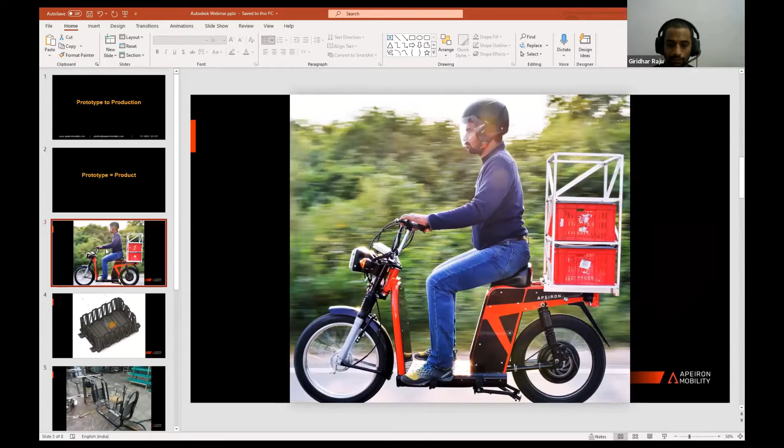So to start with, at a stage where us as startups and companies are, I don't think there's a lot of difference between prototype and product. If you look at our first iteration of the bike, that is this, and there is not much of a difference. This is our first prototype or our first product, right? So we built this, tested this thing, and delivered it to the customers, although we did tell them this is the initial batch and there might be issues which we are going to fix. Unless you are a Ford or a Tata Motors, wherein the moment you give any part to customers, you go in for a couple of million dollars worth of tooling, press tooling, molds, jigs, fixtures, and all that - I don't think there's a very hardcore difference between prototype and product.

So we try to ship all the prototypes we build, although we caution the customer and handhold them through what could go wrong and if there's any support needed. So to start with, I would say to keep the time or the effort minimum between building a prototype - something you just want to test the functionality of - and then something you can give to a customer. I think the whole process starts at the design phase itself.

In terms of when we start designing, we'll have to keep in mind what's the whole manufacturing process, as in how are we going to manufacture that at whatever scale we are. For example, in the first batch of our bikes, the first batch was 2 bikes, and then we did 10 bikes, and then we grew on from there. Same with our battery pack - battery packs for 3-wheelers.

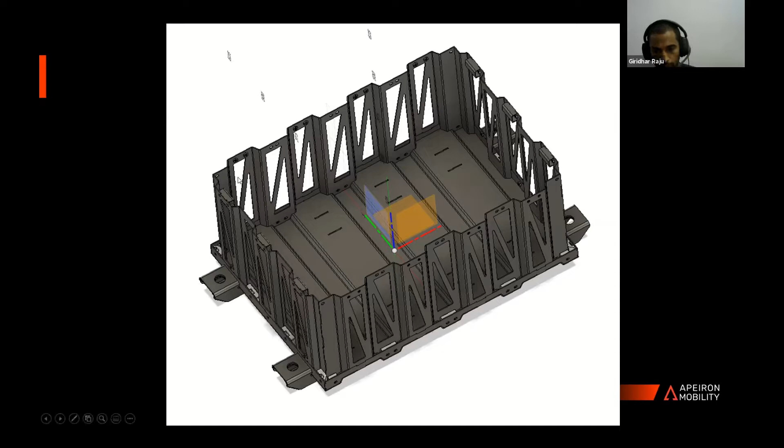For example, all these parts have been modeled keeping in mind that we are going to laser cut them out of say 1.6 mm sheets or 2 mm sheets, then weld them together, bend them in a press brake, and then weld them together. The important part is you just have to use the features to the best. For example, to assemble this thing, we don't use any fixture - there's not one single fixture used to assemble this. How we are able to do that is, I'm just going to go to my Fusion screen. Sure.

Let me open that up. Can you see my Fusion screen? Yes. So, the best part is these two.

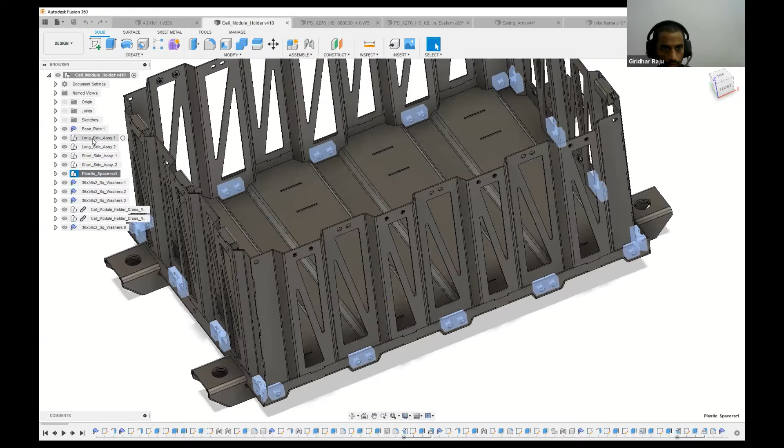For example, these two are two different parts. One of them is just a bent part, right? There's no complication. It's a straightforward 1.6 mm steel sheet with 120-degree bends. There are 12 bends in this.

But then how do we ensure this works? It's easy to do in prototyping. When you want to make 1 or 2 parts, you can just sit with the manufacturer and say this is the dimension I want, and at each step you go measuring that. Since it's a prototype, when you're assembling it, you can tweak here and there, use screws and stuff to tighten it up and manage the tolerances.

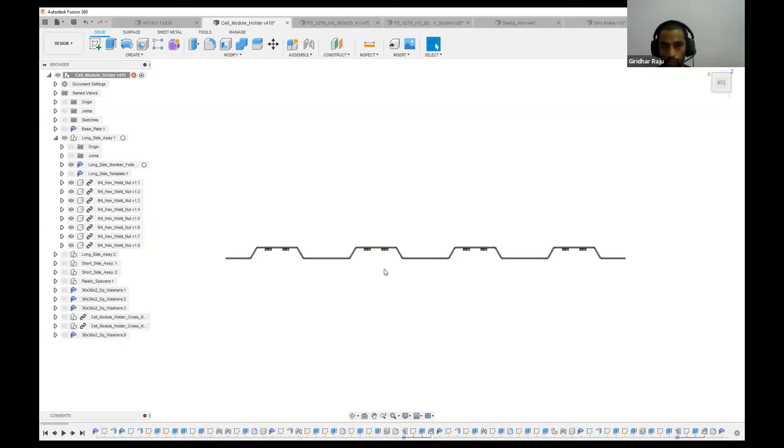But this current batch, as we speak, there are about 150 assemblies of these going on. So how do you ensure the quality stays and you get the same repeatability on the dimensions? What we did was add this member.

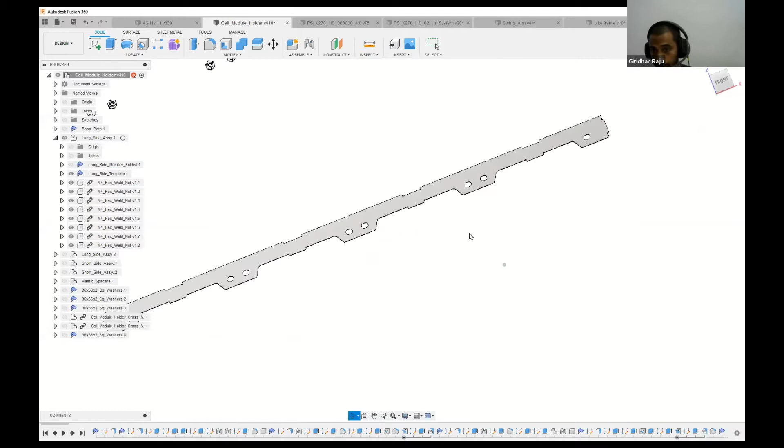If you see the slots here, with whatever tolerances we allow on these two different parts, this is a straight cut part, so there's no way a laser cutting machine is going to miss on that. The tolerances are usually up to 0.02 mm, depending on how old the machine is and how good the operator is.

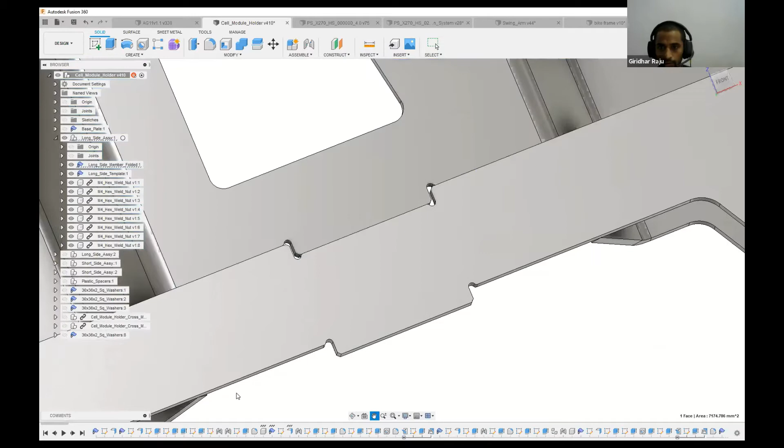Now if this part is cut and bent, it will just go ahead and sit in these slots. There are slots for each bend here. I don't want to use fancy words, but I can't find a better one — I'd just say it's designed for assembly or manufacturability. I don't have to have a separate fixture to go ahead and assemble that. So we made these parts.

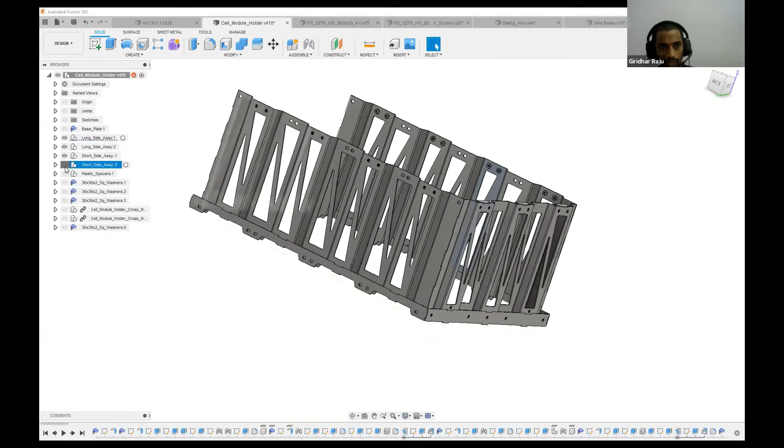Now once you do that, how do you go ahead and make a full box out of it and ensure there's no flex? There are 12 bends here, about 9 bends here, 10 bends there. These are 1.6 mm sheets, and the length between this part and that part is about 500 mm. How do you ensure they align properly without any mess?

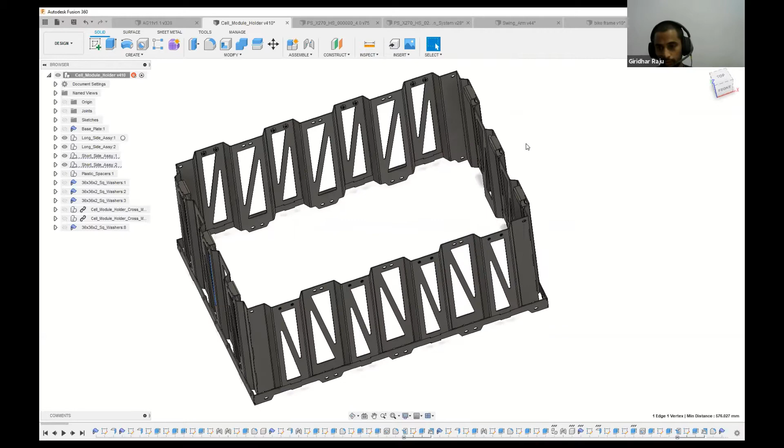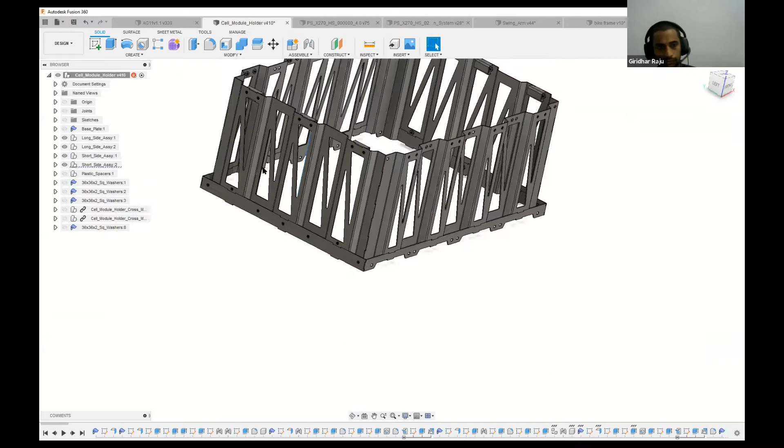You use the same slots at the corners. So if the part is assembled right, they just go and sit there in the respective slots. There's no way the operator or welder assembling this is going to mess it up. Similarly for all the parts, same with the base plate that we do.

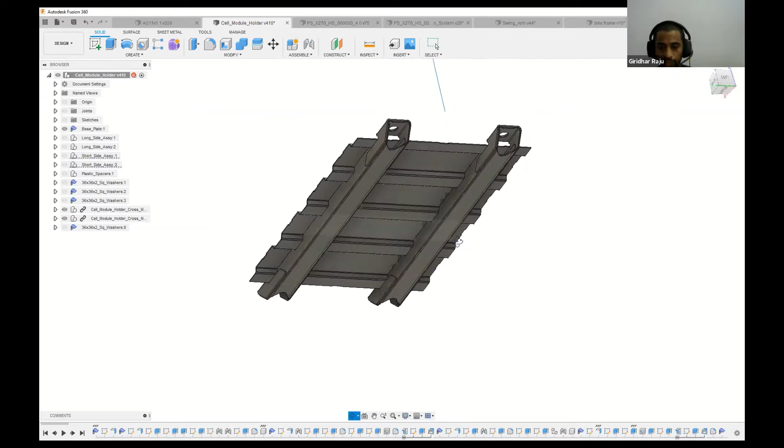The most important and significant structural part is the base plate. It's got 12 plates. This is going to take the whole load of a 140 kg heavy assembly, and this is an automotive part, so it's got to take 30G shocks and 3G vibration loads for about 2 hours in each axis.

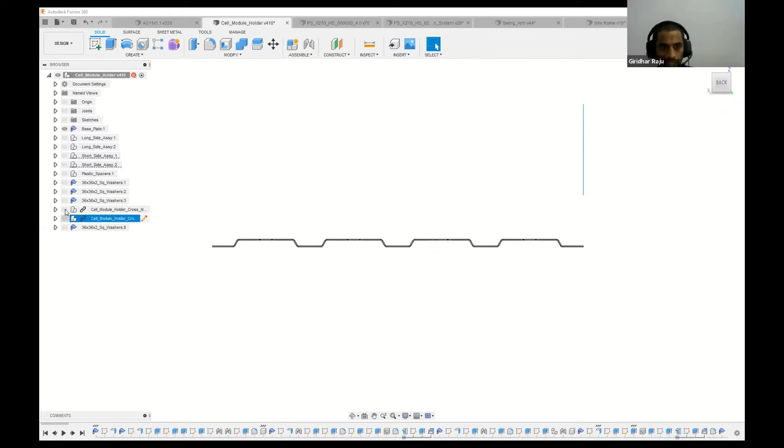We did the same with the base plate itself — it's a 2 mm sheet, just bent, no complications — but we ensured there are alignment holes. These alignment holes have similar slots on the reinforcement bars.

This is one example of how you can take any product from your first prototype to production without investing significantly in tooling and taking time for that. I'd say the biggest challenge for any product going from prototype to production is the cost of tooling and the whole cost of fixturing the assemblies.

Once you take care of these things during assembly, and if you're cognizant of how you're going to assemble the thing, you can build the whole design around that. Figure out what tools you have — we use a significant amount of press brakes, and CNC press brakes are quite accurate.

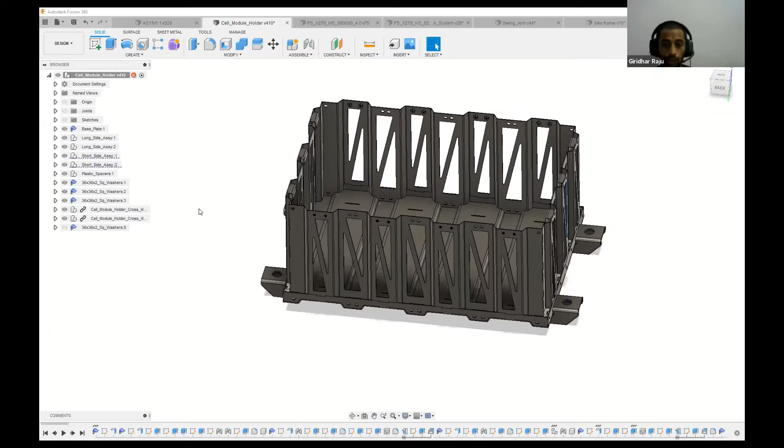You can get angles close to 0.1, 0.2 degrees, and the dimensional accuracy of about 0.5 is easily achievable. Ensure that the assembly has tolerance for such an offset. Also, this is a structural part, and for shock loads of 30 G on each axis, you have to ensure that these don't deform.

So what we did for that is, we have 3D printed spacers. We have a farm of about 4 3D printers running at least 18 hours a day on a continuous basis. With 3D printing being so cheap nowadays, I think it's a no-brainer to use it in all kinds of manufacturing processes.

Same with our bike. When we built it, about 8 to 10 kgs of plastic on the bike were 3D printed. I'm not saying go for 3D printing for all parts. What I'm trying to say is you have to take stock of what resources are available to you, and then design your process and components that can be built on those systems and scaled.

It's a different case for each company. For example, Prusa almost 3D prints 100% of the plastic parts on their printers. It's a huge company - they've sold about 100,000 printers so far overall, and most of the parts, at least all the plastic parts, are 3D printed.

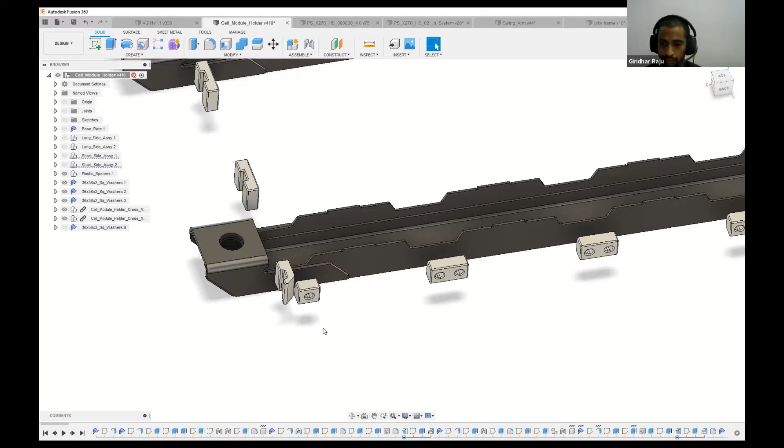That's the gist of it. Apart from that, during the design process you have to be extremely aware of what components are available, and what products already exist in the market that you can use ready-made. For example, bearings are standard, linear rail guides, fixturing components. In the automotive case, there are a lot of suspension parts available as standard.

And the wheels, tire patterns, handlebars, and displays - we just have to try and leverage all those things to keep tooling costs low and go to market as soon as possible.

The benefit of doing this isn't just about keeping costs low, but it helps you get to market faster and iterate faster. If you can realize something works or doesn't extremely quickly because you have the parts available already, rather than going full hog and doing the tooling - injection molding tools can be extremely expensive.

Once you do the tooling and you figure out either design changes, or the customer requirement changes, or the part just won't sit right - these are extremely costly mistakes, and they can set you back in terms of going to market by about 2 to 3 months.

Specifically with situations like now, the pandemic happening globally and suppliers not working full time, it can set you back by 6 to 9 months. You never know - specifically, there's a huge shortage of chips.

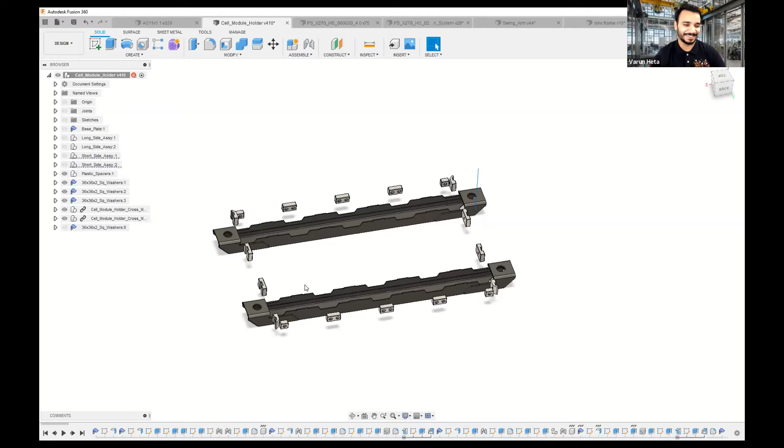Thank you so much, Giridhar. I love the approach that you are actually using additive manufacturing in your end product and improving your workflows - this is a very good thing. One question I have is, I see these small connectors attached to the assembly, the white ones, which are additively manufactured. What is the material you're using?

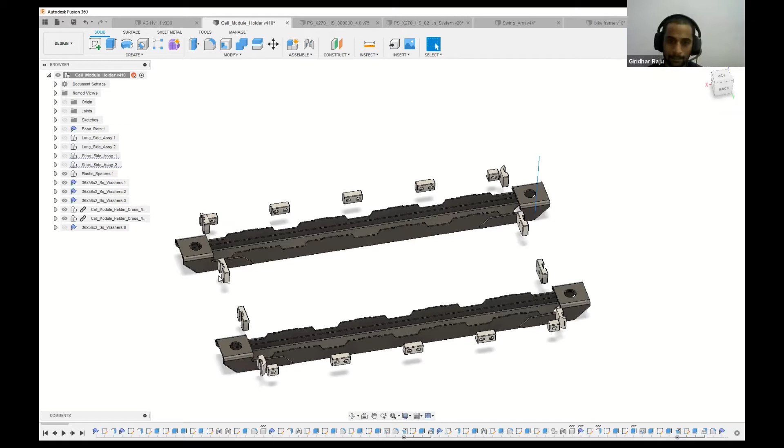This is ABS. Ours is an automotive component, so we mostly use ABS or ASA. When we tend to talk about Prusa, usually people are using PLA - I personally use that because it's fast through the plate, but that's not convenient, I think.

The problem with printing ABS is you have issues with warping and things like that - the print just warps and won't stick to the bed. So you just have to go through a bit of trial and error.

So in our case, we have enclosures for all the printers, and ensure that the printer is printing at 100 degrees Celsius all the time. And the bed temperature is 110.

You just tweak little parameters, and you should be able to get pretty good prints with ABS. Personally, I love ABS, the way it prints, the strength. A lot of times we just print the part in ABS and then machine that to get a better finish, or to get certain forms that you cannot necessarily print strong enough.

Well, it's totally a great approach. You are using rapid prototyping techniques for your actual production job, that too in sheet metal and laser cutting. Yeah, so I think it's a good takeaway.

I remember when I visited your facility in Bangalore, you were showing me one great big variety of bikes, one yellow bike and all those things. Do you have anything to share on those lines, if that's not something sensitive?

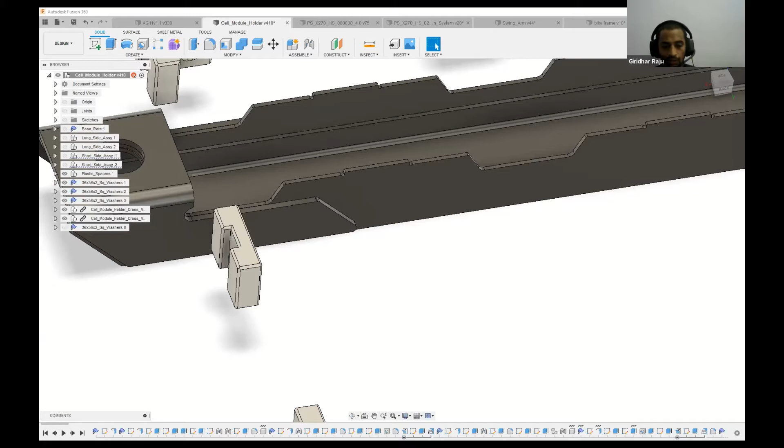For example, if the same part that I was discussing, if I have to do 100,000 parts, the process I'm currently doing is going to be expensive and time consuming. In that case, I'll have to invest in tooling. But there needs to be validation that I'm going to be selling 100,000 parts every month before I go to tooling at that scale, rather than doing 10 parts a month and investing in tooling while not being sure it's going to scale or not.

Totally. The way I see this also is, I think whenever we design a prototype or something, we should all consider designing it as identical to the actual final product, so that we maintain all the standards and processes.

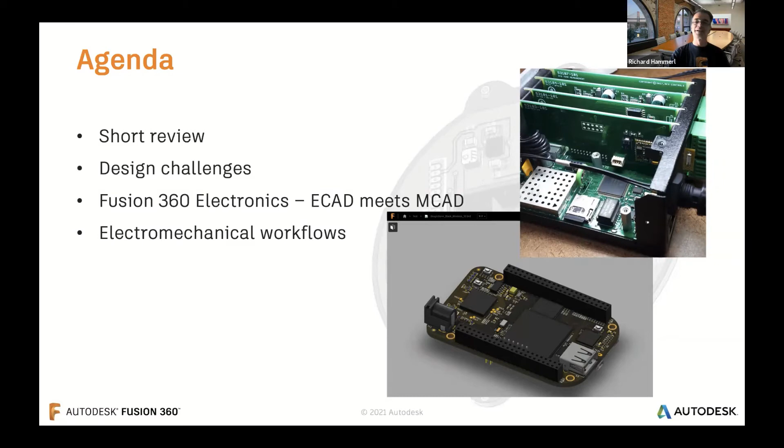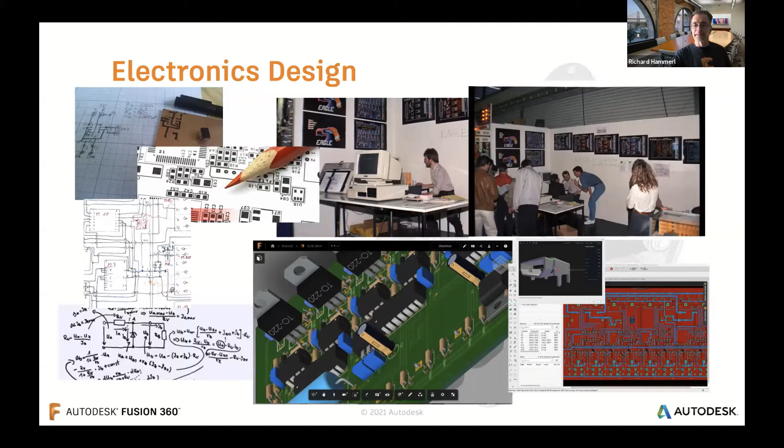And if you compare it to the mechanical world, there was a similar development. In the beginning, you drew everything on paper. I learned this in my studies—I started to draw with big sheets of paper, construction plans and all this stuff. And then, of course, we got computers.

The steps from one to the next are always shorter and shorter. So that's something we see—we increase the speed of our design tools. And that's the reason I would like to talk about the design challenges.

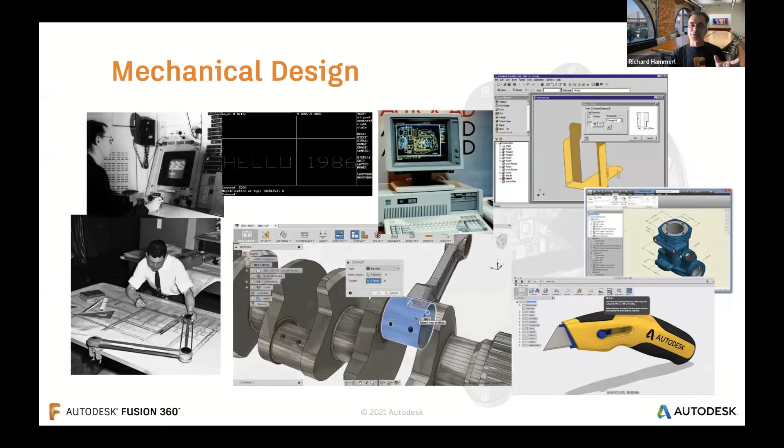What do you expect? What do you need as an engineer if you want to do electronics, if I want to do product design? I would like to have a design environment that meets both the electrical world and the mechanical world. Because do you know any product—of course there's some—but most products have electronics inside.

I also want to be sure that everybody works with the recent version, that all the functionality is there and that it works as I expect. And I collaborate—I want to work in a team, and I need to quickly respond to design changes, for example.

If you go back, when I started with CADsoft and Eagle, do you know how we did technical support? We wrote letters, put them in the mailbox and sent them. A support case took a week or two. Those times are gone—it's good that they're gone, but we need quick response. And that's why we bring...

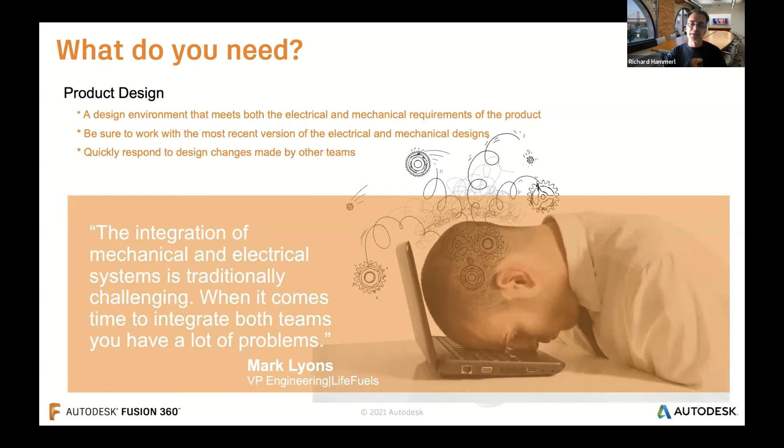...electronics and mechanics under one hood into Fusion. And because we want to have an effective collaboration, we want to work together.

Varun, you're in India. I'm here in Europe. Our colleagues, most of them are on the west coast of the US. So if we would work together directly, I can't simply take the phone and call you. I need a way to be efficient in collaboration. That's something we bring into one platform, and that's again Fusion.

And of course, if you think back, how do you exchange data? It's a file conversion. When I was in Eagle or any other ECAD system, and I want to bring my ideas into the mechanics world, I export something—a STEP file, a DXF file, whatever it is—and then I import it.

And then you decide, okay, you have to do a change. I have a second version, a third version, a fourth version, and say, oh, the fourth version wasn't good, I have to use the third one. Then you send the third one to your guy who does the mechanics. He gets a lot of files, and it's hard not to make an error here.

I've seen this very often—say, okay, there's something wrong. Yeah, it's the wrong version you took, you have to take this one. And this costs a lot of time and money, and that's something we want to avoid.

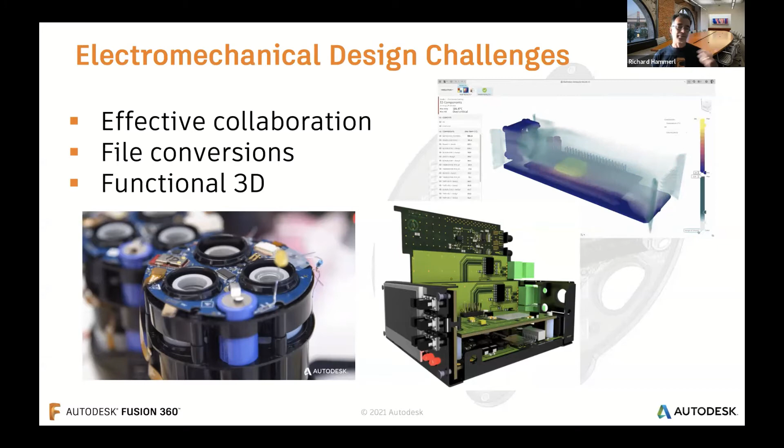And the other thing is, we would like to have a functional 3D. So I don't only want to have an image of my PCB, I would like to use it. I would like to do a thermal simulation, as you see here in the top right image, for example. And that's something we want to do with Fusion.

I think 5 years ago, Eagle was acquired and brought into Autodesk. Our first step was to make Eagle collaborate with Fusion. This was the first step—I want to have my 2D PCB, I want to create a 3D, and then I want to go on and do something with it, bring it into my product. This was the first step.

There was a lot of development in recent years, a lot of functionality came into Eagle. I don't want to mention all of it, it would be much too much to tell you. There are a lot of new functions in routing—guided routing, push and shove—a lot of improvements also in schematic and library design. We have 3D models assigned. Yeah, that was the first step.

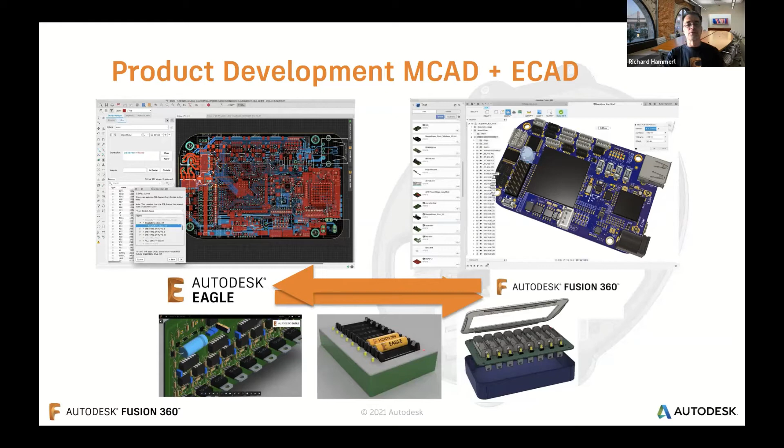And I think since the beginning of last year, 2020 in January, we have electronics in Fusion, what we call Fusion 360 Electronics, of course. And let me show you how the workflow now is.

I'm in Fusion and I start the electronics design. Now we go from bottom left to the right. And the first step typically is, of course, I would like to create my schematic. I have an idea and want to bring it onto paper, so to say. And therefore I need components.

Fusion offers a lot of components for you, so you can use them—resistors, capacitors, all that stuff. You have access to all the libraries that have been made with Eagle 20, 30 years ago. So you have access to a big pool of libraries where you can also use library definitions from the web, download them. And of course, you can create your own. So you build just your schematic.

And at any time, you can switch to number 2, the 2D PCB. I simply click, I want to start with the PCB—that's one mouse click, and Electronics opens the 2D PCB editor, and you can start arranging your components. You can think about the geometry of the board, for example. Every change you do in the schematic is automatically transferred into the board, and vice versa, the other way around.

With the schematic, you see, I could also do a SPICE simulation. If you're not aware of what it is, you can simulate the functionality of your electronics design and see what happens if I switch on and have power on my signals, what happens in the signals. So you can evaluate, is it good or bad what I'm doing here? Will it work as expected or not? Yeah, so that's also a part of electronics.

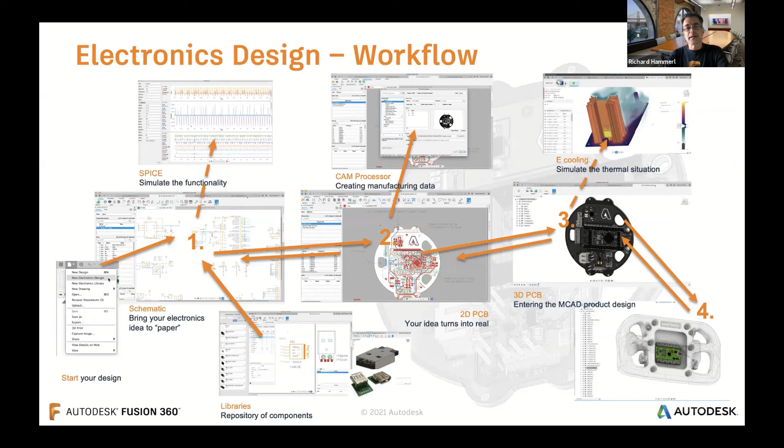And the next step is, as I already mentioned, we have the 3D PCB as the core in our design process. And from this 3D PCB, I can do an e-cooling and thermal simulation on the board, for example. I can use Fusion for rendering and get super nice images of my product. I can create milling data, so if I would like to mill a prototype, that's also possible.

Of course, I can go into a manufacturing drawing, bring my board in, have a part list in the manufacturing drawing. And of course the main purpose or the main workflow would be going into the design workspace, bringing my board into my enclosure, into my product. Not only one, there could be more boards, it's an assembly, and you bring everything into your assembly drawing.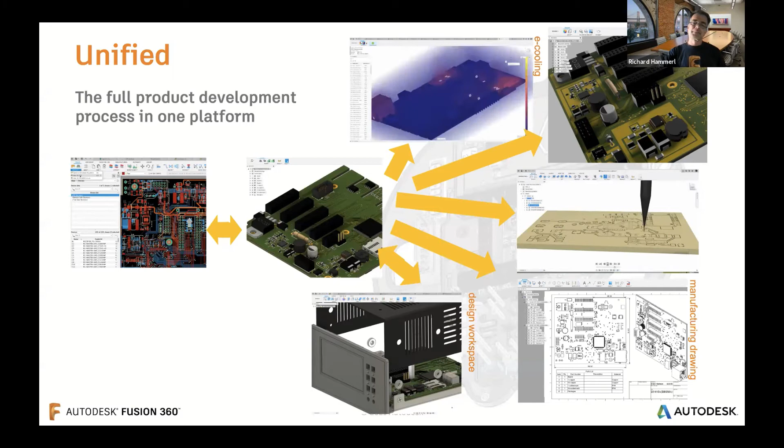And one nice thing I mentioned in the beginning was about collaboration, and that's something I would like to show you. It's also really nice for electronics, because you could share your project, your schematic, your board, your 3D PCB with others, with your colleagues, with your boss, with somebody from marketing, because you simply give them a link.

They even do not need Fusion to work with, they don't need to know how to use and open the files. You give them a link, they use the browser, look into this, they have access, you have the 3D, you can do some commenting, you can write some information there. So it's always up to date what you'll be seeing here. If you do a change in your board and save it again, you will always be up to date and everybody knows what's going on.

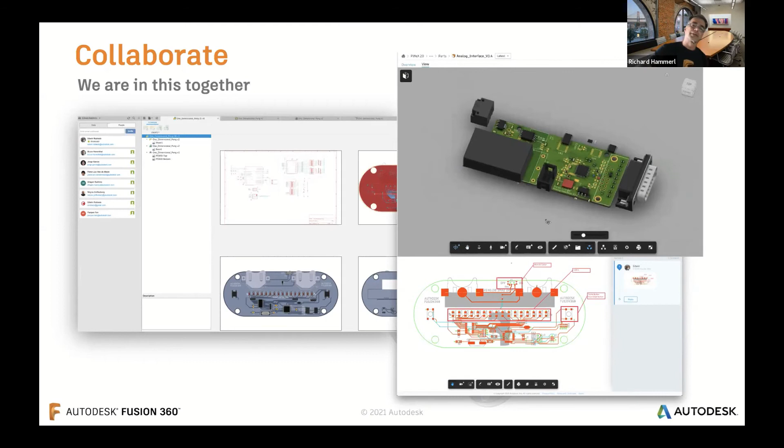And that's a really nice environment. It's not nice, I don't find the right word, it's really amazing to work this way. And all we have is inside Fusion, it's one platform, there's one set of data. You don't have to convert anything. You just go into the schematic, into the board, into the 3D PCB, share it with your colleagues via Fusion Team so they can look into it with the browser, for example.

Okay, so now let me show you a bit about the workflows.

There are basically two ways I think we're working, and finally it's a mixture of both. One, the PCB drives the geometry of the product. Thinking about electronics, people designing the electronics know everything about the circuits, what parts they want to use, what's exactly inside. The enclosure, they don't care, that doesn't matter. We discussed this often at Autodesk, because an electronics customer thinks totally differently than a mechanical customer, since he has totally different priorities. We think about electronics inside our PCB and the enclosure isn't important. That's what I know from the electronic side.

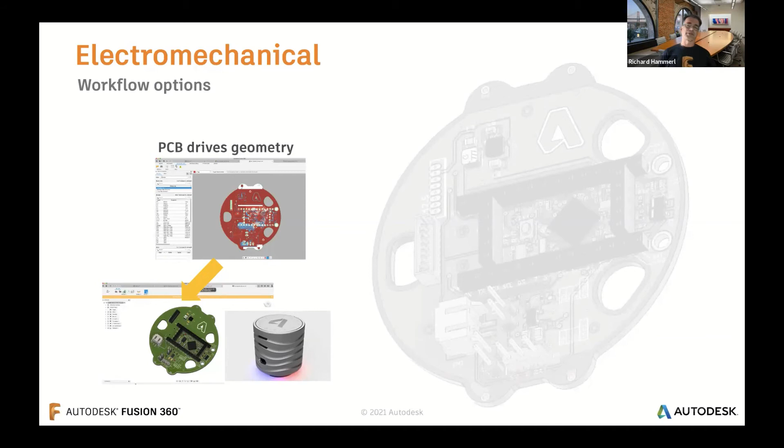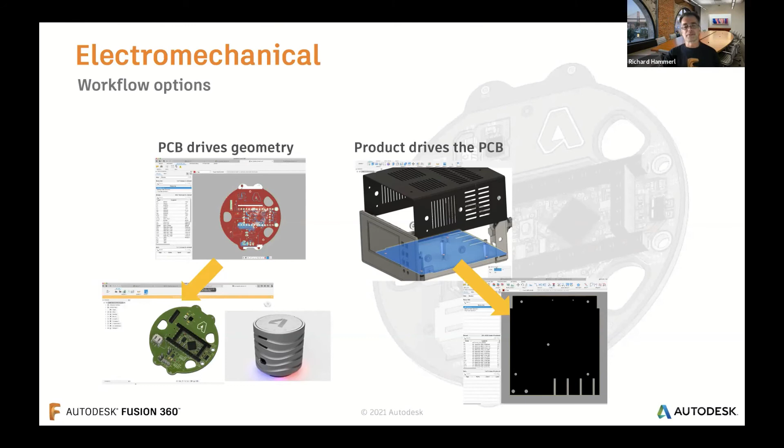But of course it's also the other way around, because if you have a product designer, he wants a smooth appearance, it should look good. He says, okay, that's the product, and you have to bring in your electronics. I don't care what's on your board, but it has to be this size, you have this room, that's exactly what you have, nothing more, and you have to try to bring this into the product. So we have these two ways of working, and I think it finally evolves into collaboration, and that's the reason why we do this in Fusion.

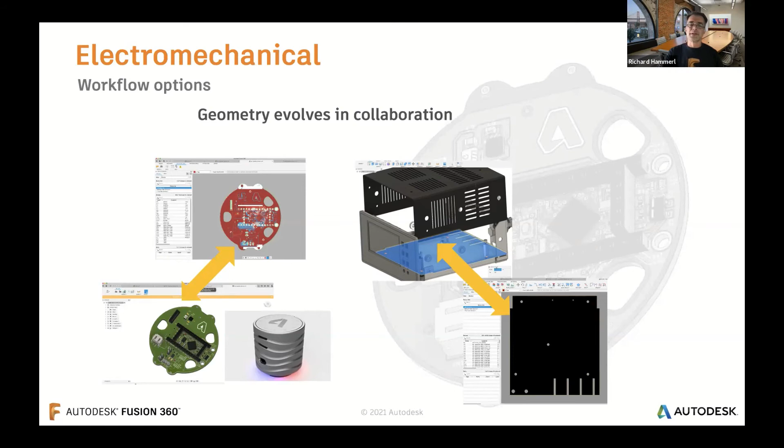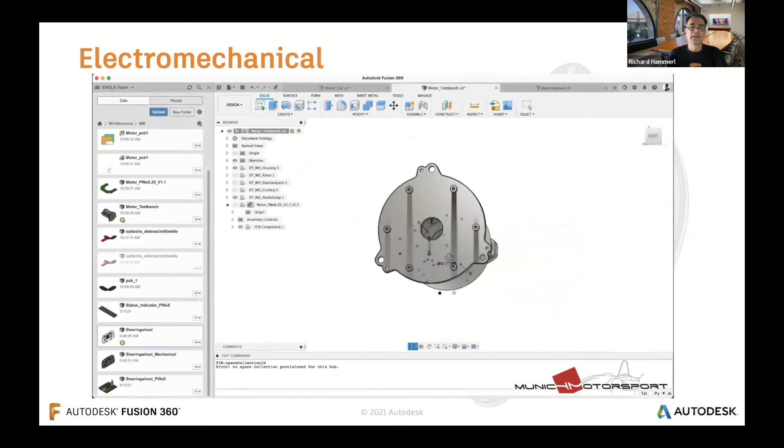Here we see, for example, that's an electromotor for driving an e-vehicle. It's mounted on one of the axes for each wheel. And what we like to do is, you see here on the back side, I have different connections and so on, and I need some electronics. Let me switch off a few of the things here.

Actually, you see we did the first try. There is already a printed circuit board. Now you see it in a moment. Here it is, just as an idea. But we want to do a change. I would like to have another geometry of the board, and I have a sketch here inside which describes the contour of the board. It's pretty easy to design.

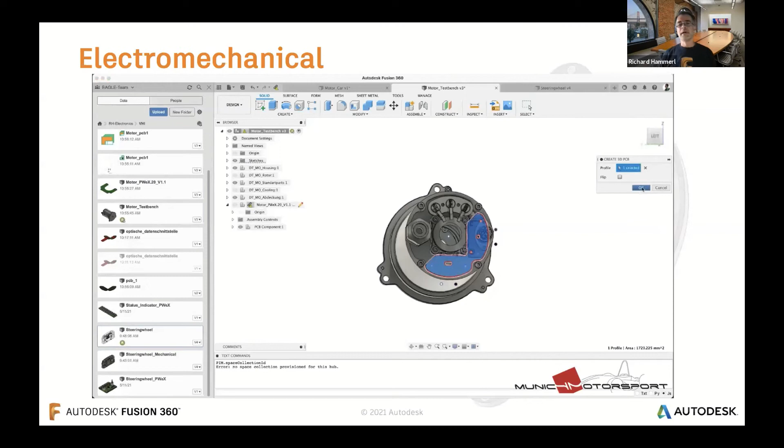I simply click Create 3D PCB, click here, start, select the profile. You could have one or more profiles, and you can care about holes and so on. Then I say okay, and now a new tab opens and you see the 3D PCB, the shape, it's there, exactly how you designed it in the mechanical part. Now I save it, and let's go to the next thing.

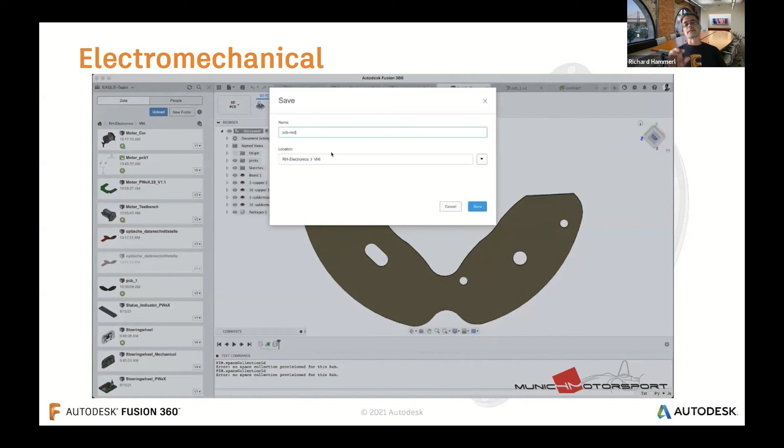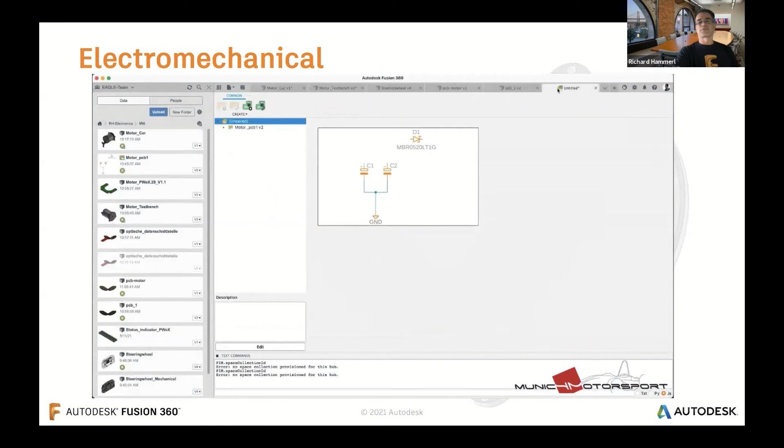So that's the mechanical side. Now I'm on the electronics part, because I would like to design a schematic. Oh, please, I have to apologize, 3 components, that's not really a schematic, but just to show you how it would work.

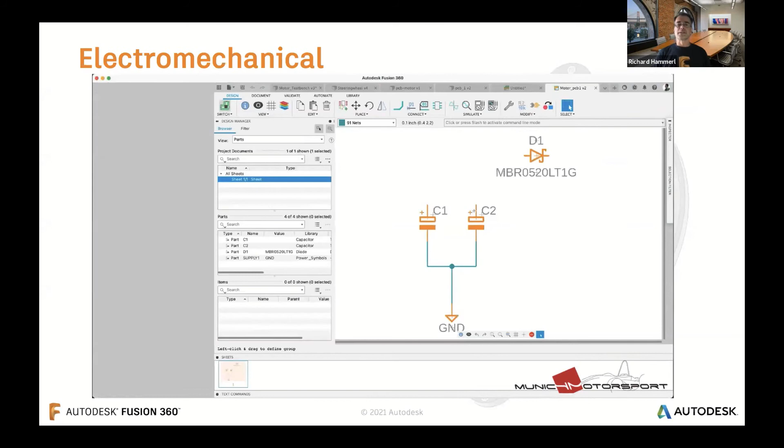So that's my schematic. At any time I can switch into the PCB. I click here, switch to PCB, it's the 2D PCB document. You see here it opens, you see kind of a template, it's a rectangular board. I move the components there, of course I can arrange them, I can start the routing, I can mirror them on the bottom side, I can do whatever you can think of.

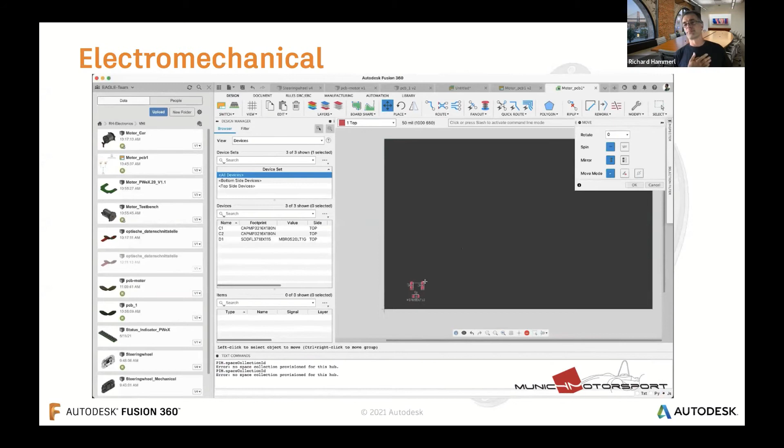And of course, at any time, ideally at the beginning of the design process, you get the contour from the mechanics part, from your mechanics colleague, and that's very simple. I save my board now, and let me switch to the 3D PCB and show you how I bring it into the 2D PCB. That's one mouse click, so now it's two mouse clicks. I'm here in my 3D PCB, and now I choose Link to 2D PCB. That's the icon. I select which PCB, it's my motor PCB, and simply say okay, and it's linked and it's inside. So the rectangle is replaced with the contour coming from the motor.

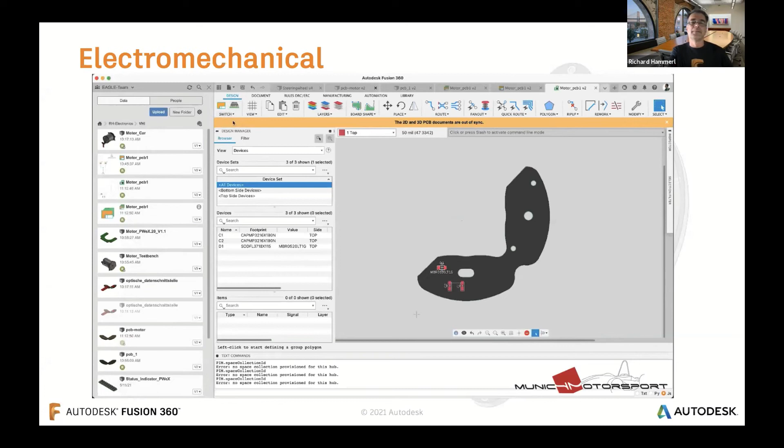Now, of course, I have to do some rearrangements, and you see the yellow message, the 2D and 3D PCB are out of sync. Why? Because I don't have the components on it. So I just click here, View 3D PCB, click on it, and now you see it's in real time. It takes about 2 or 3 seconds, and then the board is populated. So I can go back and forth, it's just switching the tabs from 2D PCB to 3D PCB.

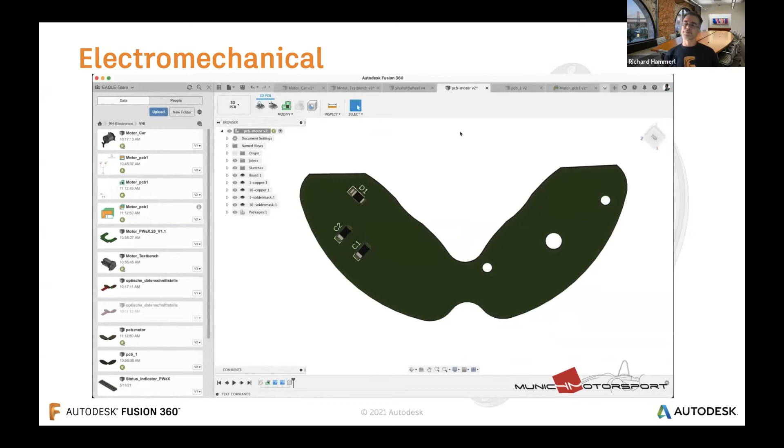And there's even one step more in this last slide I would like to show you. This is about edit in place. And here we're in a situation, I know it's very simple, I have an enclosure and I have a PCB inside my product, inside my enclosure. And now what I see, or what I can do, just let me start this.

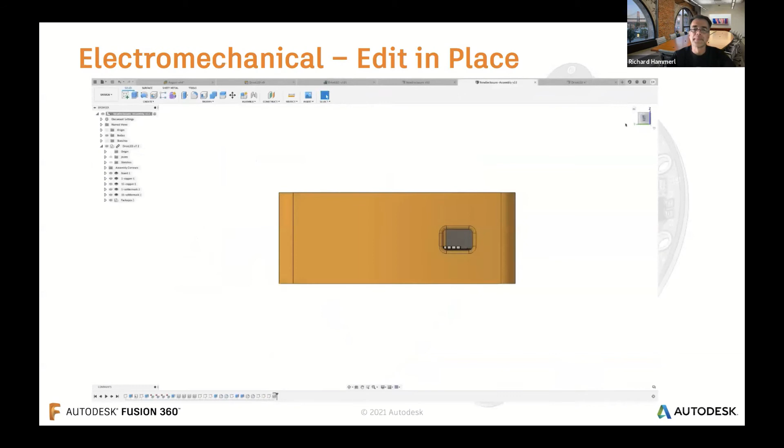Go back. So here you see that's the 3D PCB linked to it. And now if you move it, you already see the opening for the USB connector is not at the right position, and I would like to change this.

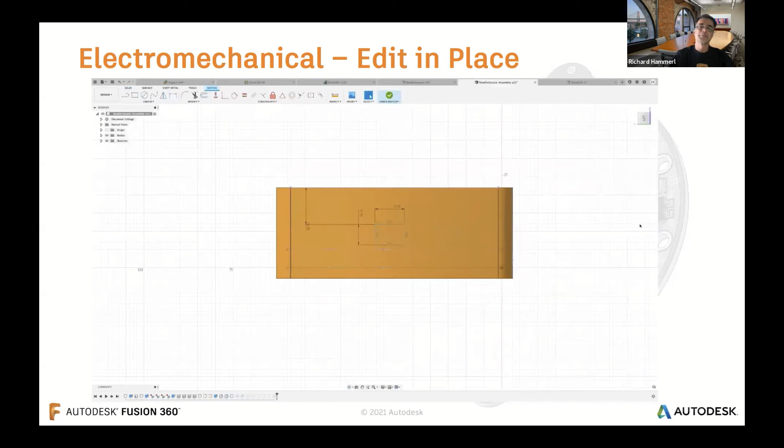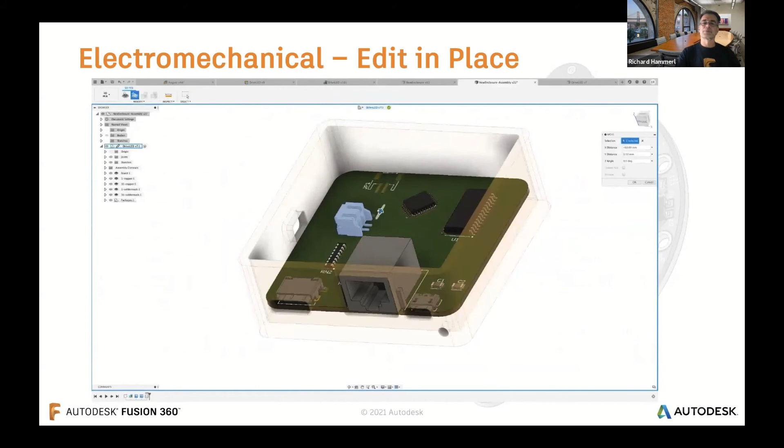I have 2 options. I can either edit the sketch here and simply move it to the right, to the correct position, or I could do an edit in place for the components of the electronics part. If you go here, you see the small pen, red and green, red and yellow. You click it, and you enter edit in place mode. Now I can click, move the component, rotate it, move it on the board, bring it to the right position.

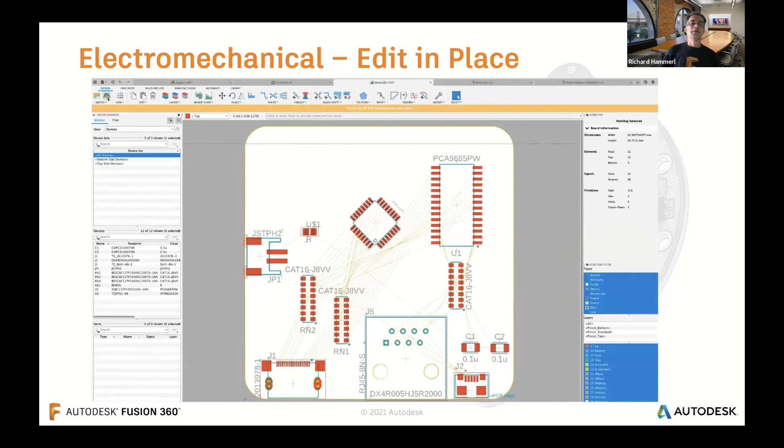Here it's done. I say okay, save it, and it's transferred onto 2D PCB, and so it's back in 2D. You see here I'm already on 2D PCB, and now I just want to move something on 2D PCB to show you how this goes back. I save it, say view 3D PCB, go into the assembly, and now you see it takes some seconds, and now the components move.

So that's basically the workflow we have, and of course it's a very simple example. I could have shown you more sophisticated examples, but basically I think it's okay to see how we work.

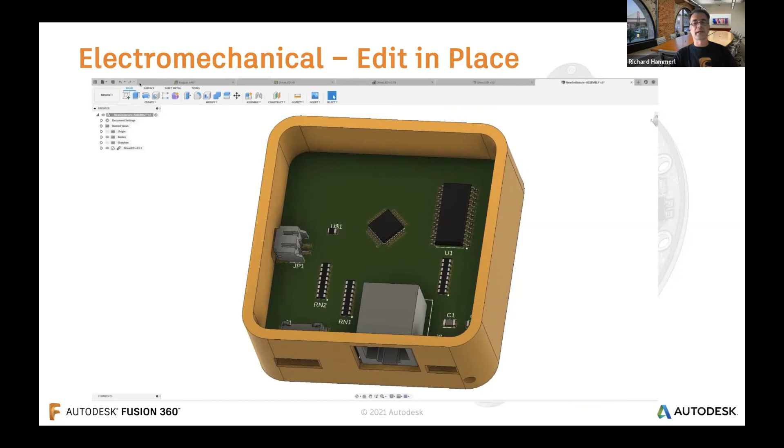And it's really, as it's written here, it's just one tab away. So I go from 2D PCB into 3D, make changes, go back and forth. I go into the assembly, I can do some changes, edit in place, and bring this back into the PCB.

And everything under one hood. No file conversion. Easy collaboration. You see immediately if something happens in the 2D PCB or in the 3D PCB, you're always up to date. And that's what I wanted to show you. Thank you for your attention.

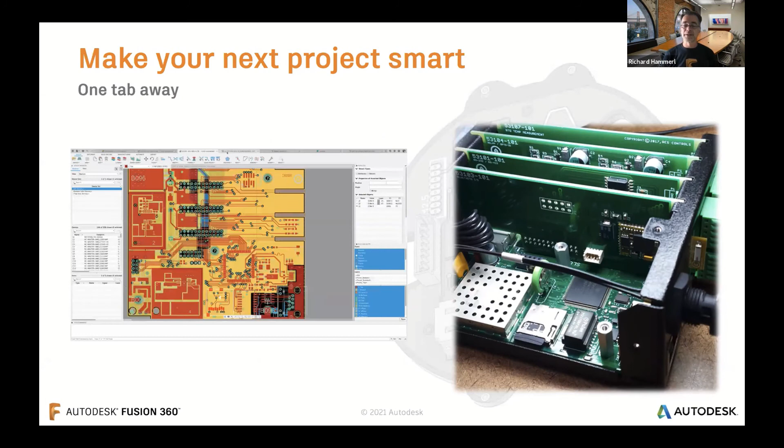Adityan asked this question: which 3D printer is good for printing automotive standard parts? I think Giridhar would be able to answer that. Varun, I think you are a better person to answer this than I am with your experience in 3D printing. But if you really want an answer from me, all I can say is it all depends on what kind of budget you have and what kind of scale you're looking at.

So almost any 3D printer with bed temperatures of 100 and above can print automotive grade parts. It also depends on what material you want to print, maybe PETG, ABS, ASA, or flexible parts. It depends on that.

There are a lot of comparisons online, and there's a new printer added almost every month, so there's always a printer selection guide depending on your budget and the features you want. I wouldn't commit to a single model, but personally we have a fleet of about 4 Prusa printers, and we love that. They are so scalable, there's always support, and you can connect them to the cloud, so you can print from your PC, you don't have to just go and slot in the SD card each time. So we love Prusas, but there are definitely other good models, and it all depends on what budget you have.

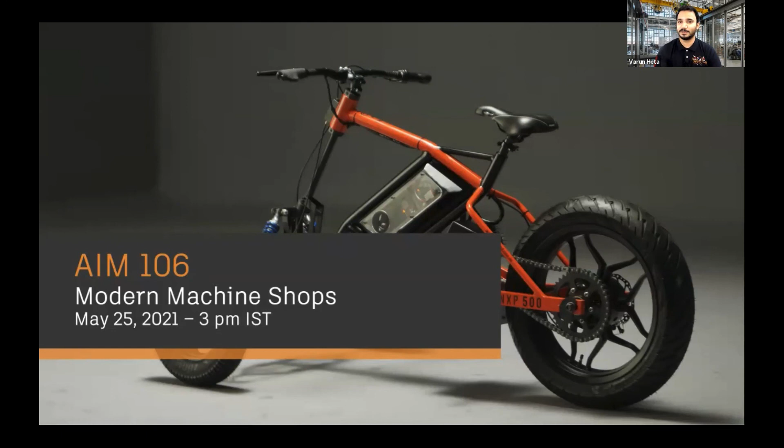So this webinar is about to end, and I thank all the participants and the panelists for being here with us today. Thank you, Giridhar. Thanks, thank you, Richard, our pleasure here. Thank you, Anand, thank you, Varun. Thank you, Giridhar, thank you, bye-bye. Thank you all, Richard. Have a good day, and I'll see you next week. Thanks again, see you, bye-bye, bye, bye.